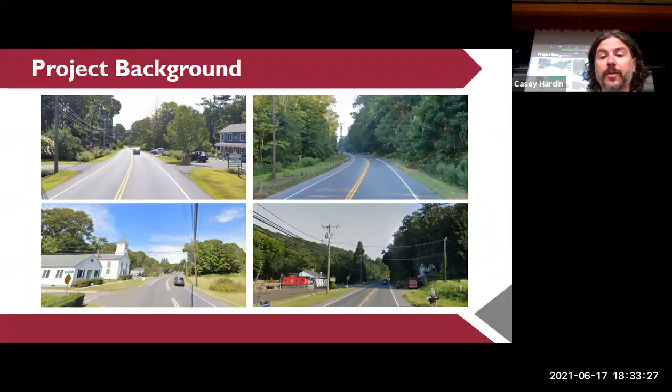So Oxford, as you all know, does not have a typical walkable New England downtown. Functionally, State Route 67 serves as the town's main street. The municipal center, Quarry Walk, and the major commercial areas are all located around this route, but there's currently no way to safely access any of them or transit in Seymour without a personal motor vehicle.

The town and the residents address that issue in the Oxford Plan of Conservation and Development, or POCD. The POCD prioritized creating a plan for streetscape improvements along Route 67 in order to improve non-motorized access to the corridor, create access to the Little River and open spaces, and generally create more of a downtown feel on Route 67. In 2016, the Oxford Main Street Project Committee was formed out of that planning process with the goal of creating a pedestrian and bicycle-friendly pathway along the Little River and Route 67.

The committee worked initially on the Little River Nature Preserve and developing concepts for streetscape and bike-ped improvements in that vicinity. The town began applying for various grants for individual improvement projects on Route 67 around 2016. What was missing, however, was a comprehensive plan looking at the entire corridor, assessing needs and constraints, and presenting a plan for connecting individual projects.

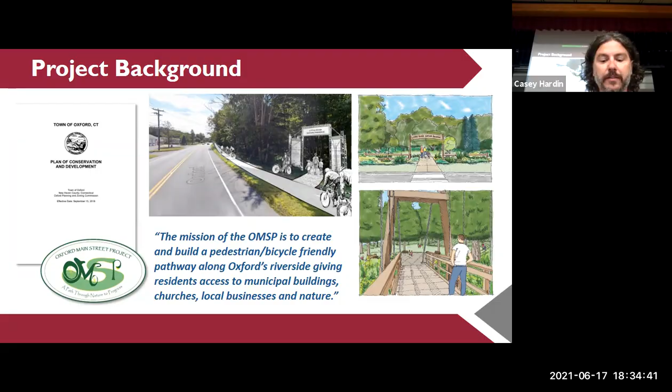This type of plan would help funders see that all the little individual projects the town is proposing are part of a larger vision, and that the town is planning to implement that vision. So the town requested NVCOG's assistance. I work for the Naugatuck Valley Council of Governments, your regional planning agency, and we worked with the town to create a scope for the Oxford Route 67 alternative transportation study.

The goal of the study is to establish preferred bicycle, pedestrian, and transit improvements within the Route 67 corridor, with input from the town, the Connecticut Department of Transportation, key stakeholders, and the public, and to provide Oxford with information including project concept designs, phasing, costs, and potential funding sources to help the town procure funding and advance projects and concepts. NVCOG allocated available federal transportation planning funds to the project, and TranSystems was selected to conduct the study.

For the last 18 months, TranSystems has worked with the Oxford Main Street Project Committee to study the corridor and the feasibility of transit service in Oxford, and to develop recommendations about how best to route a bicycle and pedestrian trail along Route 67. Early concepts were presented at a public meeting last fall, and input from stakeholders and the public was used to further refine those recommendations.

Tonight, those refined concepts will be presented, and you'll have an opportunity to ask questions of the project team and offer comments. We'll be publishing a draft report shortly, followed by a 30-day comment period. Those comments will be incorporated into the final report that you should expect this summer.

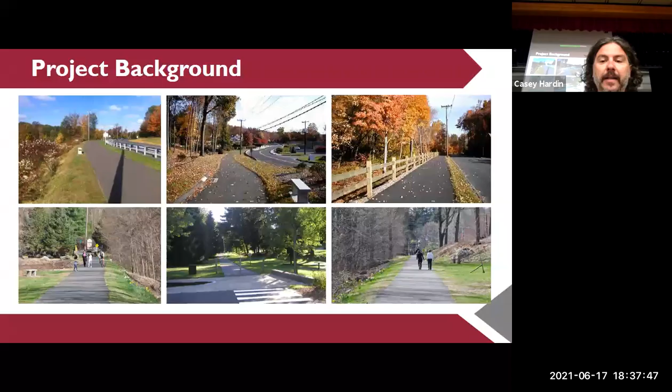NVCOG studied the economic impacts of the Naugatuck River Greenway Trail a few years ago and found that the economic benefits of a multi-use trail far outweigh the cost of building one, many times over. Those benefits are not specific to the Naugatuck River Greenway—they apply to really any trail like this. If you're interested to learn more, you can find that report on our website.

And with that, I'll introduce Casey Hardin, who is the project manager at TranSystems and has been working with the town and the COG on this project.

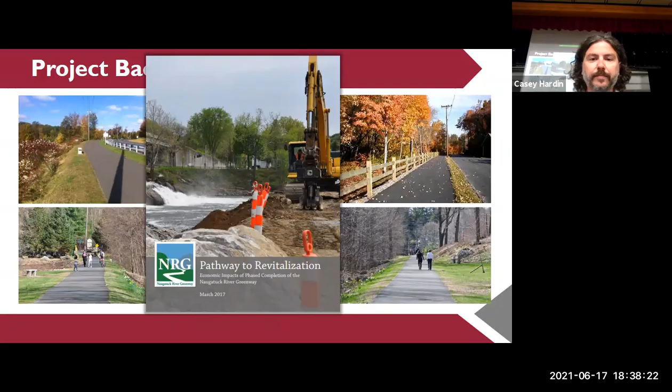Thank you, Aaron. Good evening, everyone. Thanks again for joining us. This is my first kind of jaunt back into the real public meeting after doing quite a few virtual ones. So it's nice to see some faces, and really, really pleasantly surprised with the turnout. This is great. And the one thing that doesn't happen back in my house is the fan of the projector shooting hot air onto me.

I'm going to go through starting with our existing conditions analysis, looking at the existing Route 67 corridor, and essentially what you'll see is kind of why not very many people walk and bike there today. We're going to show you how we think we can develop a facility that will be safe and comfortable for all different types of users, provide some nice connections to recreation and nature, and also help people move around in a way that doesn't necessarily require their car.

So the first thing we did is study Route 67 itself. We wanted to understand the facility from a vehicle perspective, what we're dealing with. Traffic volumes are fairly high—above 10,000 vehicles per day, which is a metric we use that kind of generally indicates a pretty busy roadway. It's classified as a minor arterial.

That means within the way the roadway system is structured, it's relied upon to move people around. It's not a local road, and it's not what we call a collector that carries smaller amounts of traffic. It's moving people between places, and speeds are high. Just anecdotally from driving in the corridor, if you're not going 50, you can collect a trail of cars pretty quickly.

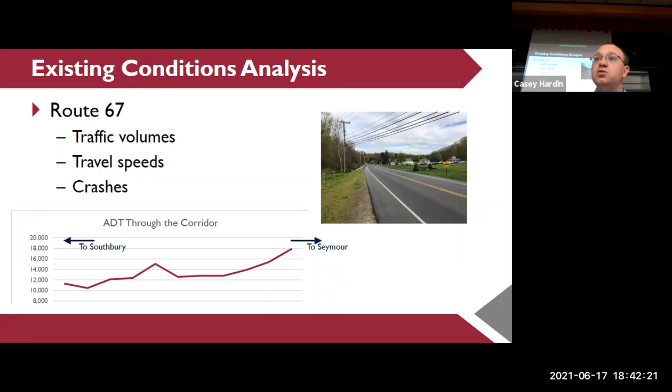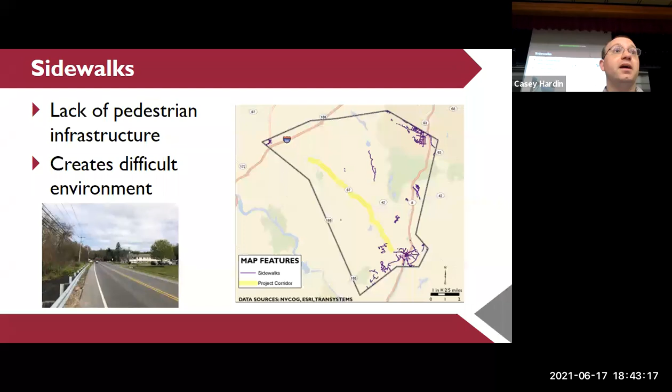And what that points us to in terms of a facility is a separated shared use path - something that provides separation for bicyclists from vehicular traffic, not putting them on the roadway shoulder. Now, confident cyclists may still feel comfortable using the roadway even after this separate path is constructed, because they may be more comfortable there than with potentially slower pedestrians. But ultimately, this type of facility would be comfortable for all users.

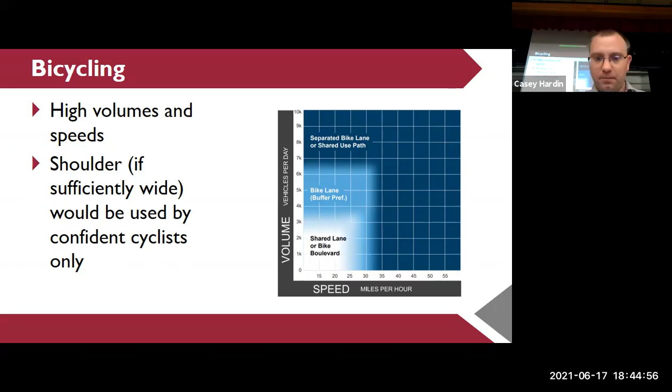That results in a recommendation for a 10-foot wide side path. A side path is what we call that shared use trail when it runs directly parallel or next to a roadway. To the layperson it may look like a sidewalk, but it's wide enough so that both bicyclists and pedestrians can use it. And we'd like to space it away from the roadway as far as possible.

There are some locations where, based on the proximity of the Little River, there are developments with parking and needs from a property perspective. We don't want to have more easements than necessary, but ideally we'd like to provide a 5-foot or larger buffer, which provides a little space to separate the facilities.

If you go narrower than that, the recommendation from AASHTO is to provide a guide railing between the two facilities. The reason is that if someone on a bicycle were to fall off, you wouldn't want them to fall into the roadway. That's really the primary reason they recommend that guide rail if you can't provide the 5-foot buffer.

In many locations through the corridor, places where we're recommending a narrower than 5-foot buffer already have guide rail. When we worked with the Department of Transportation, guide rail in and of itself is a hazard to motorists—it's something they can hit—so we don't want to introduce more of it than necessary.

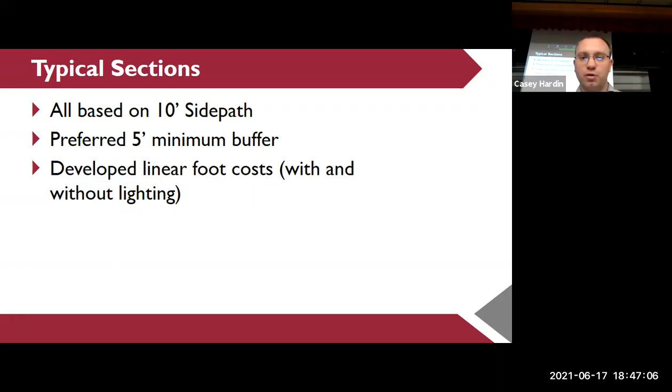The first section, recommended for about 60% of the corridor, is a base section that would have that 10-foot side path spaced about 5 feet from the roadway. This is along the existing roadway—we wouldn't plan to adjust the existing Route 67 at all—and you can see it's just flat grading behind it in many locations.

The Little River is relatively close. There are about 11 fishing areas that are publicly accessible along it. In case anyone doesn't know, the Little River is stocked with trout—it's an enhanced grade A stream, so it's a really good fishing asset for the community. Even driving up today, I saw someone at Hoadley Pond fishing, so it's something that can provide that nice connection to nature.

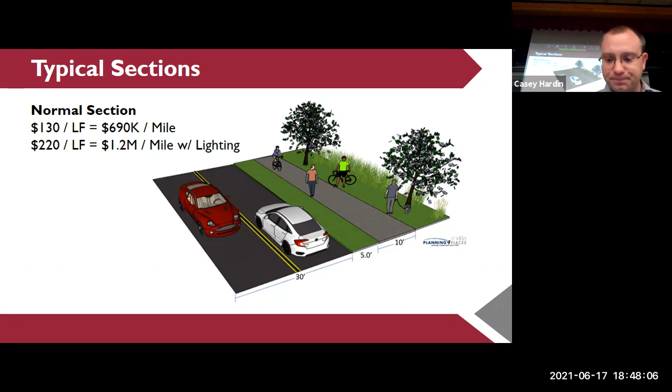So we're looking for locations where it can be a little more spaced out. For about 15% of the corridor, the side path would be essentially in front of developed areas—buildings, commercial plazas, things like that—and in those locations we'd like to provide that 5-foot buffer and 10-foot width. There may be some locations, due to utility poles or to avoid property impacts, where we neck the trail width down to say 8 feet for a short period, and neck the buffer down below 5 feet for a short period. But generally it fits most of the way, backing onto a parking lot or access to those businesses.

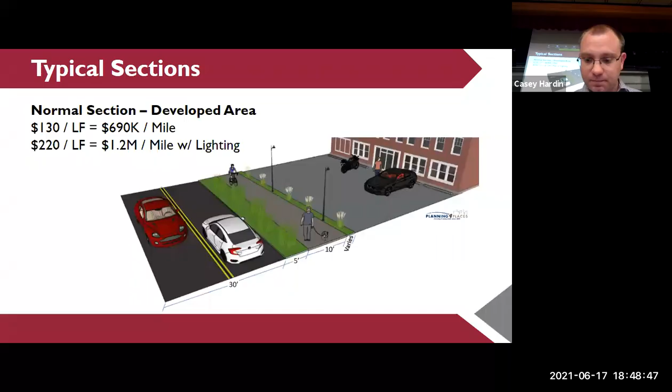For about 20% of the corridor, things start to get a little tight with the Little River—it tends to drop off pretty quickly down towards the water course. Many of these locations already have guide rail today because of those steep slopes. So we'd try to neck the trail in, reduce the buffer width to 2.5 feet, and put in a guide rail. In locations with a steeper slope down towards the water course, we'd put up a vertical barrier, a fence, between the side path and that slope, just to prevent people from falling down it, especially people biking at relatively high speed.

We've depicted a wooden fence here—that's an option, not a decision that's been made yet. As any of these projects move into the design phase, that's a decision that could be made with input from the public at a later date. You could go with a steel picket fence, this type of wood, or a few other varieties.

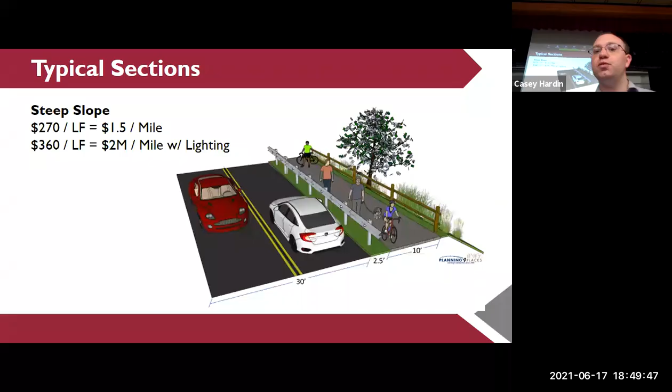There are a few locations, mostly around river crossings, where the side path will need to cross either the Little River or one of its tributaries on a new bridge—7 locations in total. In the immediate vicinity of those, due to the topography and proximity of the river, we would likely provide a retaining wall.

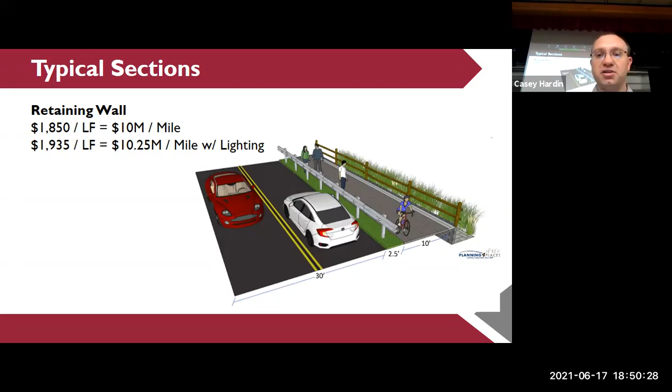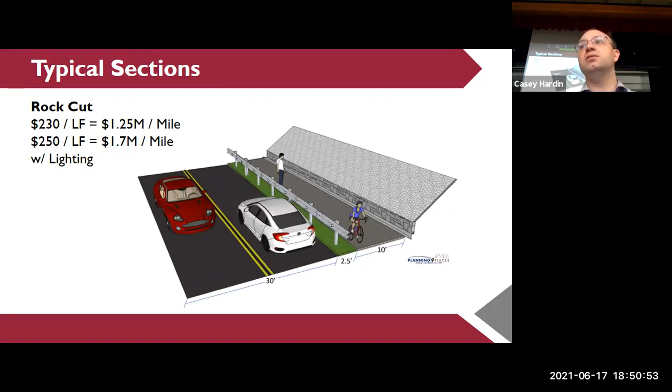There is one location just near Victory Memorial Park, Route 42, where we would require a small rock cut. There's a face of rock ledge that comes down from the mountain right out towards the roadway, so in order to put the side path in, we would need to do some rock excavation and cut that back. But again, this is a very small section of the corridor.

Finally, the last thing I'll show is what we're calling a wayfinding or rest area. As folks travel on this trail—which could be 6 miles from beginning to end, connecting the Larkin State Park Trail down to Seymour—we want to give people the opportunity to stop and enjoy the scenery. It's also likely to be implemented in phases, so at the end of each phase, we'd like to provide this type of rest area, with places for people to sit down and some wayfinding.

The trail may temporarily end at Riggs Street. What can you do from there? Well, if you follow Riggs Street, you might be able to get to Matthews State Park or the Naugatuck State Forest—providing options and letting people know what's there. Also near some of the fishing areas, we'd like to provide wayfinding to let people know, hey, there's really good fishing right over there if you just take a few steps to the little river.

So we had this collection of different typical sections, and we worked with the Oxford Main Street Project Committee to identify the right routing. The end game is we're recommending that the trail follow the west side of Route 67 throughout the entire corridor, but we looked at different options—what if we follow the river, what if we switch sides, different sides may be better than others.

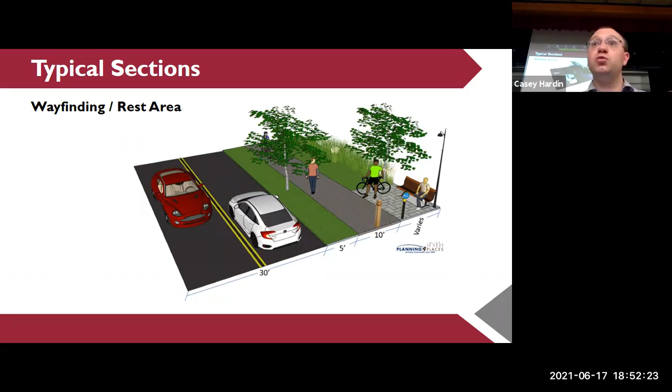Ultimately, one of the biggest decision makers for us was whether it would require you to cross Route 67. I talked about the speed, and how I was scared standing there taking that photo. We're really reticent to provide locations where, to follow this recreational facility, you'd need to cross Route 67. So that ended up being a real driving factor. We had about 5 different locations where we really vetted through these criteria, and I'll walk you through one example—if people are curious, we have the full set of them, but I'll go through this first one.

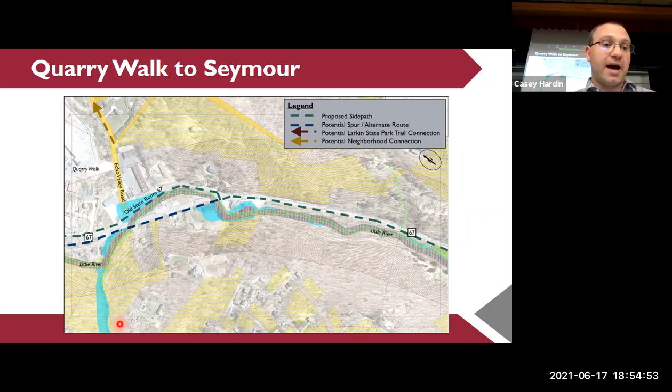But we looked at this and said this might be feasible. This would actually allow us to cross the river fewer times. We looked at our evaluation criteria, using this consumer reports type scoring style, and considered whether this one offers connections to the fishing destinations. Ultimately, big rights-of-way impact.

Old State Route 67 is very narrow. As it came back around here towards Route 67, we might have to actually have a total take, which is something that would be very expensive, and it's a business, not something we'd want to do. Ultimately, as we compared the factors, they were pretty similar, but it was just that consistency, keeping the side path on one side of Route 67, not requiring users traversing this entire 6-mile stretch to cross.

So what we decided to do is recommend some wayfinding back up here at the traffic signal with Quarry Walk. We're going to provide signs that point people to some of these fishing areas along the Little River. We're also going to recommend that sidewalks be put in along Old State Route 67 so that people who wanted to walk to those fishing areas from the side path could, but we're going to recommend the side path just continue along that west side.

So that's an example of how we worked through this throughout the corridor. There are about 5 locations. We had a great meeting with the Oxford Main Street Committee back in January where we walked through each of them, weighed the benefits, and collectively reached those decisions.

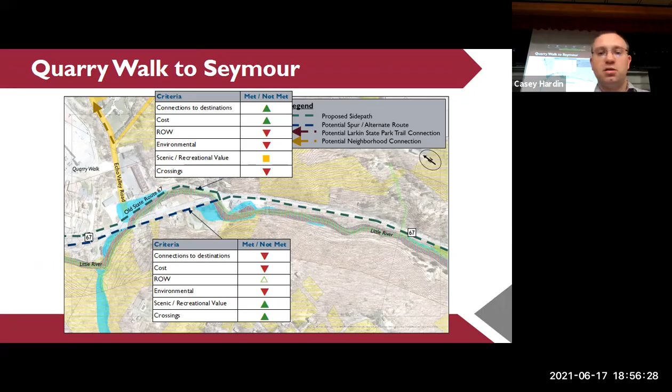So once we'd honed in on the idea of keeping the trail along the west side, we wanted to look at the implementability, working with NVCOG at the potential funding sources and DOT. I think some of them are on the Zoom call, and looking at what's a good project cost that fits within the traditional grant opportunities the town will be able to pursue.

And also, what is a logical endpoint? We're anticipating this thing being built in stages. We don't just want to drop it off nowhere. We wanted to identify some key points that said, all right, it makes sense to temporarily end the trail here while we pursue additional funding.

As part of that, we broke the corridor up into 3 segments. And I always drive the logic part of my brain crazy with the way I present this, because I start in the center, then go to the south, and then go to the north. I'll explain why.

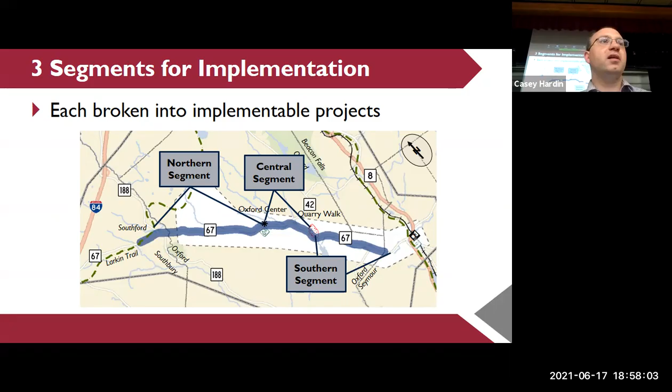This all started from the Oxford Main Street Committee's vision that started with connecting Oxford Center to Quarry Walk. That's our center segment that I'll start with first. Then connecting Quarry Walk to Seymour, that's our southern segment. And finally connecting Oxford Center to the Larkin State Park trail up in Southford, Southbury. So that's the logic on why I'm presenting this, and if you were to just zoom into the room, you'd be like, what are you doing?

So we've recommended breaking the central segment into 3 projects. The first of these is ongoing. The town has completed design, advertised the project, and it should be constructed this summer. That's in the Oxford Center area from about Town Hall to Dutton Road. We've then recommended a second project to continue it down to Riggs Street, and provide sidewalk on the east side of Route 67 in Oxford Center to try and generate more of a walkable type of downtown in that area. And then the final piece of this segment would connect it from Riggs Street down to Quarry Walk.

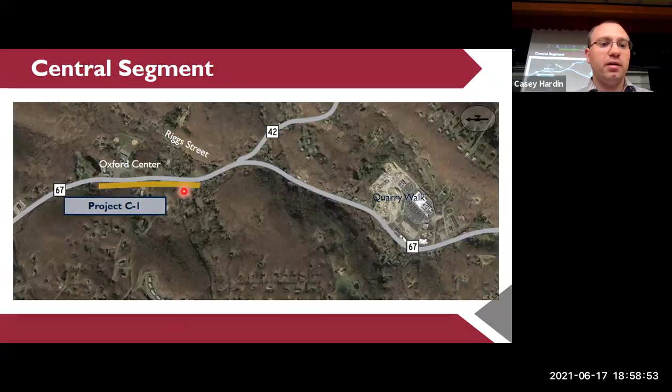So I'm going to pull up a little map here. This first segment, this project C1, should be constructed this summer. It was awarded to a contractor, that's moving forward. The town had received a community connectivity grant for that. So the first thing we're really recommending implementing is continuing the side path to Riggs Street, the signalized intersection here, and then supplementing the side path with a sidewalk on the other side of Route 67.

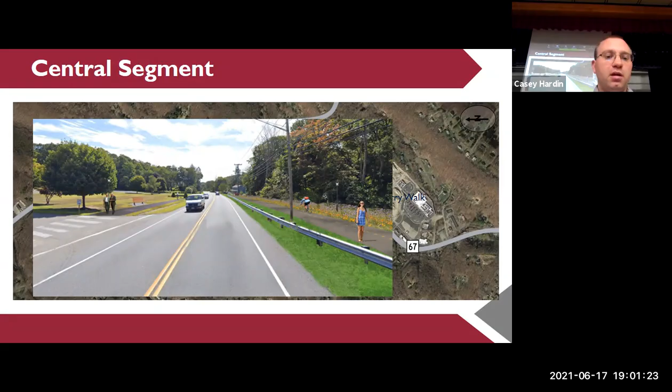So we're recommending one of those here that would facilitate accessing the Little River Nature Preserve, and then a second one kind of in the distance down at that next intersection that comes in there, just beyond the Oxford Bakery. I just don't want to leave the public empty on that.

So what we're talking about on the center school site - the town owns, obviously, our old center school, the town owns 36 acres back there. So George Temple and myself are looking into making that into a beautiful town park. So it will expand both sides of the road.

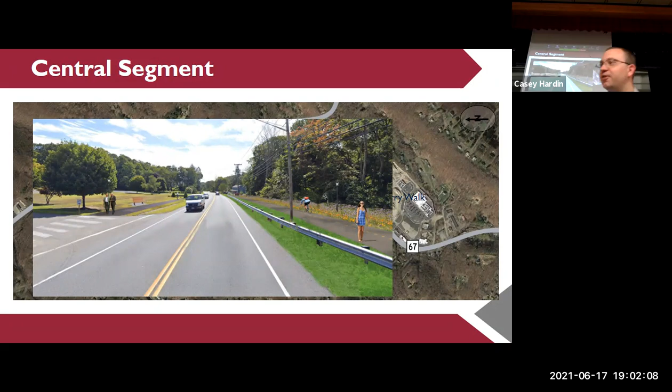There's more to come. I've just gotten started with the project, a lot more things to happen, but I wanted to leave you with something. I didn't want to leave you empty handed like what's going on. So I hope that helps. No, thank you, Jeff, sorry for throwing you under the bus there. I didn't want to leave you with that.

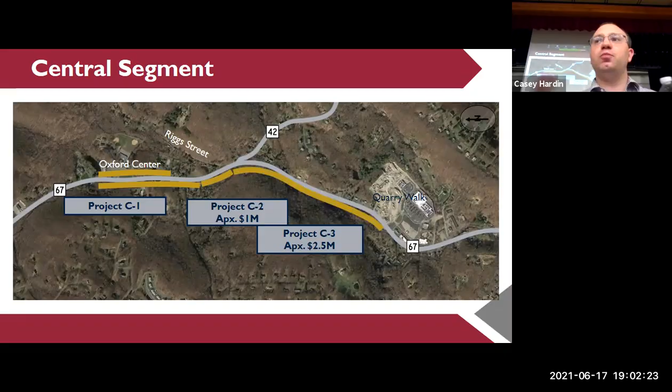So that second project, like I said, would get to the Riggs Street intersection, and then there'd be kind of a long run. We looked in, there's not really a good logical place between Riggs Street and kind of the Victory Memorial Park area and Quarry Walk, but that would really be a nice section of the side path and close that connection to Quarry Walk.

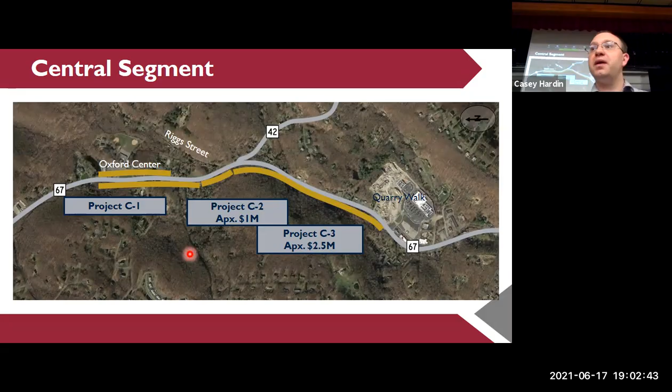There's a really nice stretch kind of through here along Route 67 where it's flat off to the side. The path could meander a bit. There's two of those fishing sites kind of here along that stretch.

And then the one kind of final piece I'll mention in terms of a destination would be that Victory Memorial Park, which I don't know that anyone really goes to. It's tough to get there - you have to kind of cross Route 67 or find a place to park your car. But it's actually like a relatively nice quiet space. It's vegetated to the point where there's some nice spots in it that feel secluded from the road because of the trees and the vegetation.

And I think with some better access and more people knowing it's there, it could really grow a little bit in terms of its use as a municipal facility. So we would recommend some wayfinding back at the signalized intersection with Riggs Street, and then we're recommending another sidewalk system to connect over to Victory Memorial Park. So this would make that connection between Oxford Center and Quarry Walk.

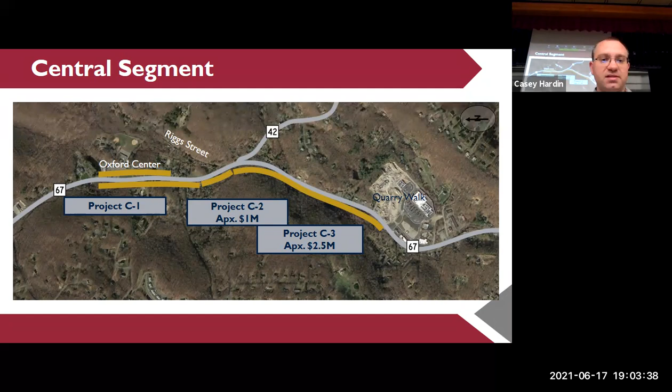And then as we think about continuing south, we broke it up again into three pieces: getting down from Quarry Walk to the signalized part of Route 67 at Park Road, and then just finishing those remaining pieces to get to the sidewalk network in Seymour, just across the town line. And then finally, we have identified a way to continue to the Naugatuck River, the Naugatuck River Greenway.

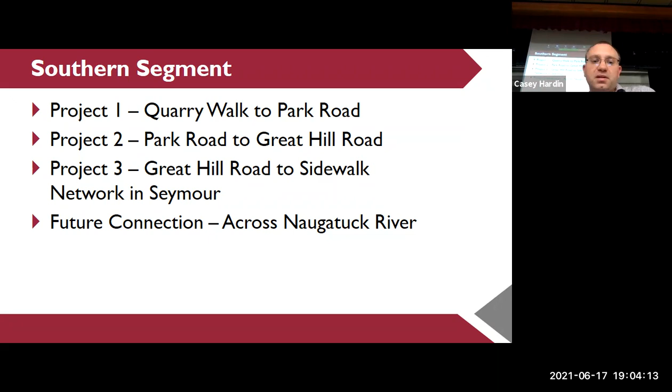That's going to require some additional effort. That Route 67 corridor is very constrained there. So sort of as an interim goal is to get to the sidewalk network in Seymour.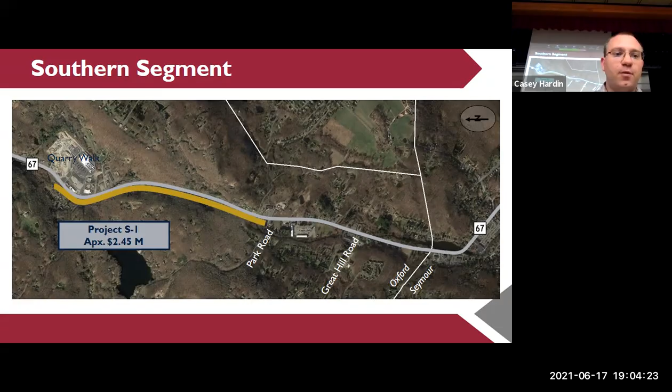So again, that first piece is a relatively long stretch from Quarry Walk down to Park Road. But it's got a nice long section where the path could meander a little bit, get close to the river. And there's more of those fishing areas along this stretch.

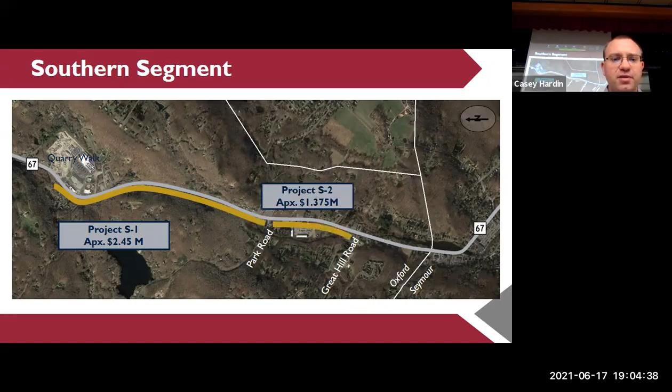Once you get beyond Park Road, there's a series of commercial plazas. This could be a good opportunity for those using the path if they need to stop and get a Gatorade, or get a bite to eat. These could be nice, especially for folks who work at some of the employment centers there—if they want to go for a little walk at lunch, a nice little asset for those areas.

And then the final piece would bring us from Great Hill Road down to that final signalized intersection at West Street, just across the town line, which is where that sidewalk network picks up.

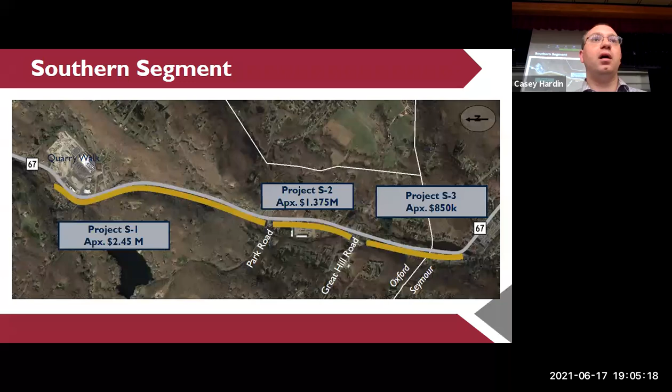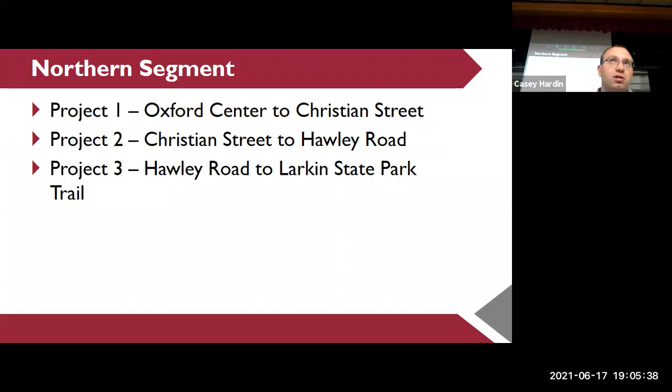So as I pivot back to the north here, this is where we'll go from Oxford Center back up to the Larkin State Park Trail in the Southford area of Southbury. And this section has some really good near-term stopping points for each of the trail systems.

Beginning at Oxford Center, which is now to the right of the map, that first section would come up to Christian Street. Here's just a rendering of kind of what the side path would generally look like, maybe meandering a little further into some of these flatter areas. That's sort of generally what it would look like adjacent to the roadway.

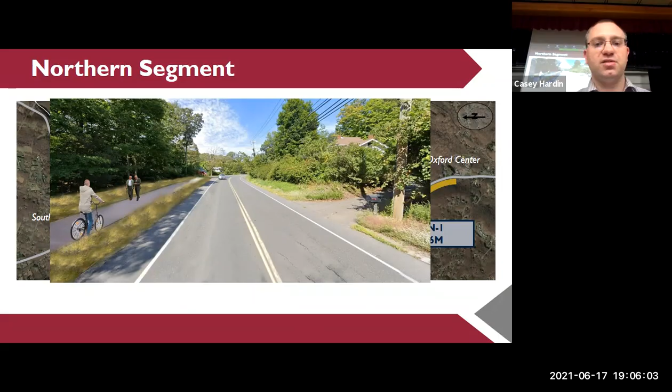So that first part would get you up to Christian Street. And then at Christian Street, we could actually provide some wayfinding that would lead people to the Larkin State Park Trail, or the Larkin Bridle Trail as it's known. I'll just draw that on the map here—it does this little loop-de-loop. It crosses Christian Street a little further back than we're ultimately going to connect to it, but we could provide some wayfinding at the end of this first project extending north from Oxford Center.

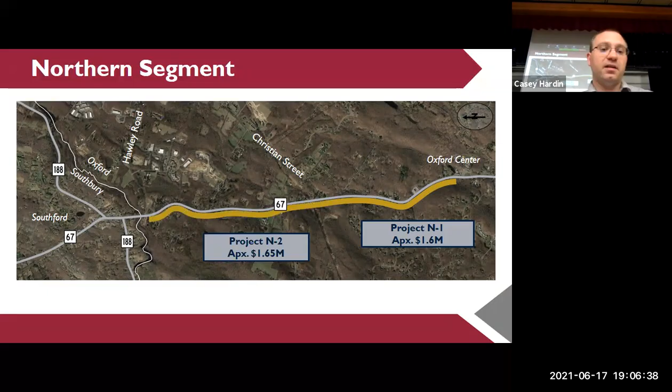The second piece would bring you past Rich Farm—this is where the little river has kind of left us to meander up into the hills here. So this is just a nice wooded, vegetated area. Folks could pop into Rich Farm, get an ice cream, some other good destinations along this section, but mostly rural.

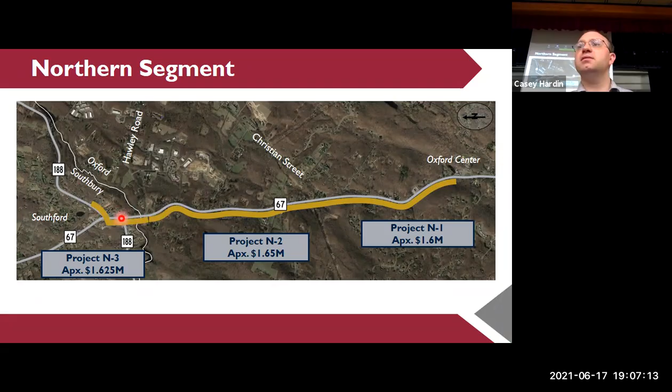And then the final piece would just connect to the Larkin State Park trailhead, which is just up 188. So again, we'd be entering that little bit more developed area in Southford. There's some banks, some restaurants. We'd use that signalized intersection at 188 to make that turn. And then there's already a trailhead where folks can park for the Larkin State Park Trail, and we just tie into that.

And that's sort of a high level overview. I have more detail if we want to get into that as part of the Q&A. I've got some other exhibits I can pull up, but we wanted to give you the high level understanding of what the game plan is and how we'd like to implement it.

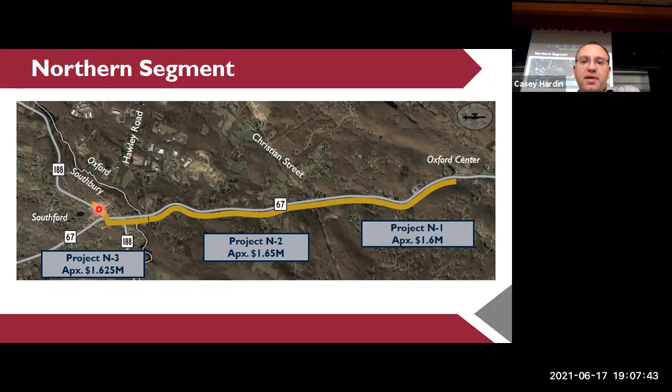I'm going to transition here to talk a little bit about transit, because that was another facet of the study where we looked at the town as a whole, not just this Route 67 corridor, and tried to understand how we could provide residents and folks who work and come to Oxford with other options.

There was a feeling coming into this, one of the reasons for starting this study, that folks only had the option of getting in their car and driving places. So we ran some calculations based on demographics, income levels, types of people that live in Oxford, rates of car ownership, density, and ultimately we found a need for about 13,000-ish rides per year. We felt that the demand for a fixed commuter service, your normal local bus route, just wasn't there—it wouldn't really be sustainable.

However, there's been a real push in rural communities around the country to engage in what's called microtransit. That can be done with the advent of systems and the kind of proprietary apps they use—the Ubers and Lyfts of the world—which has started to make its way into public transportation, where providers that have a fleet of smaller buses can provide demand response service.

So when you need a ride, you can either book it ahead of time the day before, or you could call and ask for it and wait for somebody to come pick you up. But it enables these fleets of buses to respond and react much more dynamically than they ever were in the past.

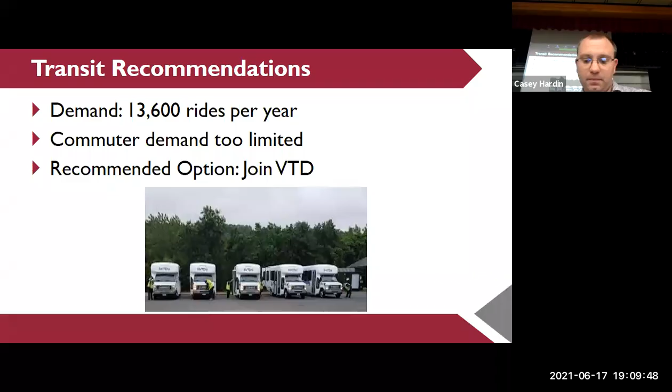So just getting to the finish line here. Like Aaron said, the report will be posted onto the website very soon. Once it goes up, there'll be a 30-day comment period where people can submit their comments to Aaron. We'll take a look and we'll look to address them.

We'll get those incorporated and we'll finalize. And then we'll seek the formal endorsement of the Board of Selectmen and be happy and willing to work with the town as future grant opportunities come around to help support them in the implementation of what we think is a really cool and exciting project that could be a real asset for the town and the region.